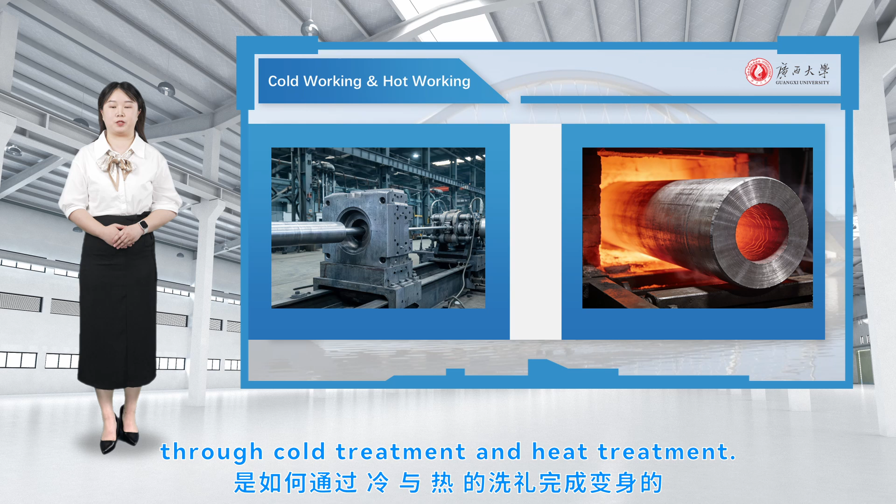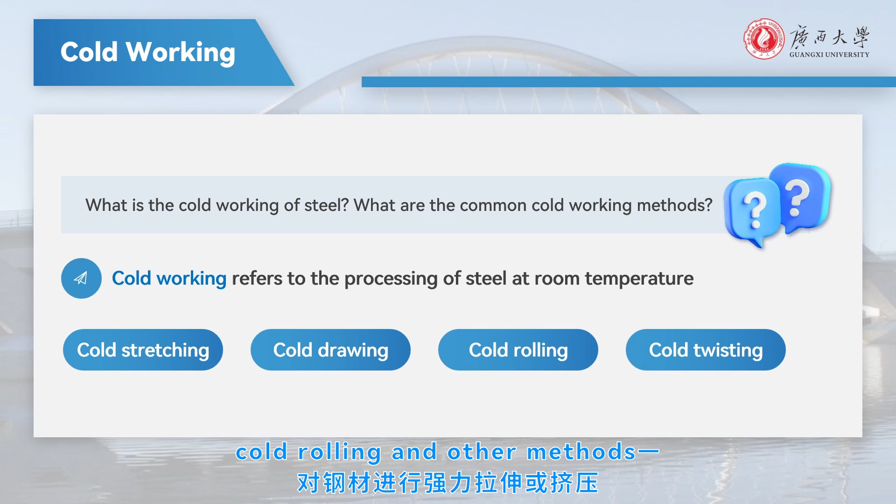First, let's talk about cold working. Here, cold means at room temperature. At room temperature, steel is stretched or compressed forcefully through cold drawing, cold rolling, and other methods. This is its transformation process.

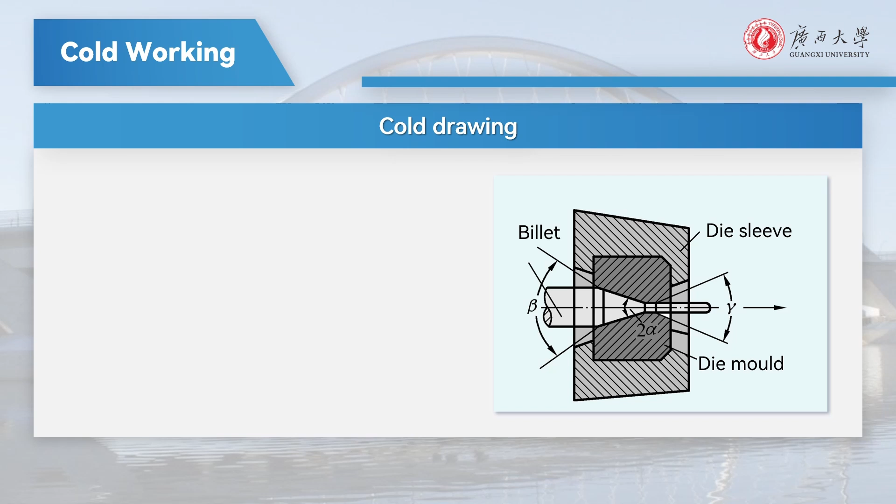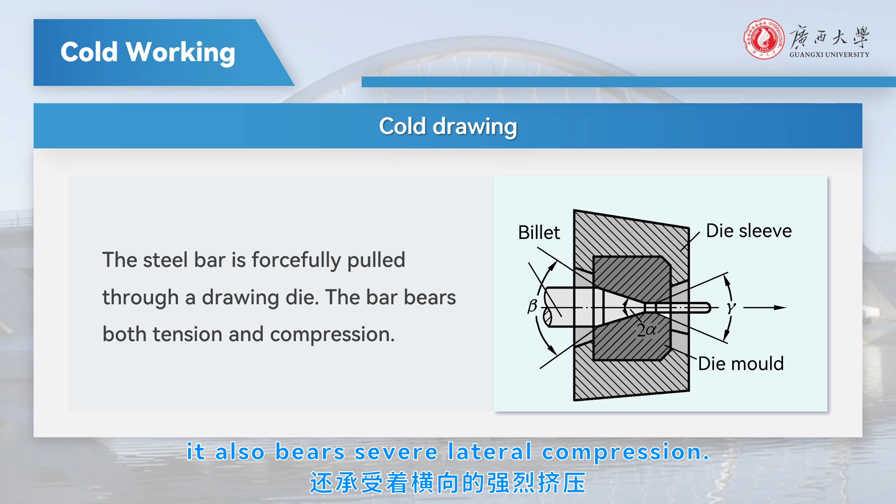Cold drawing pulls steel bars forcibly through a drawing die with a slightly smaller diameter. During this process, the stress state of the steel is very special. It is subjected to a strong tensile force in the longitudinal direction, and meanwhile, due to the restriction of the die hole diameter, it also bears severe lateral compression. This combination of tension and compression greatly improves the density and strength of steel.

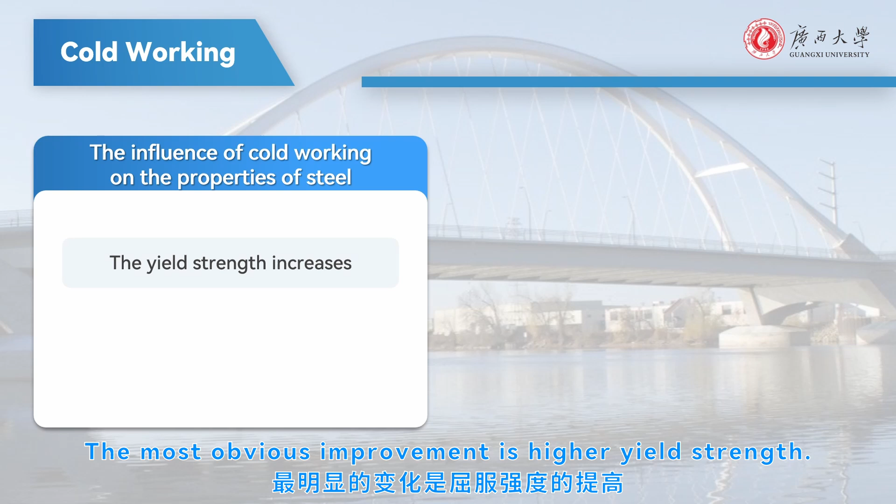Cold rolling turns round steel into deformed steel bars on rolling mills. What changes does cold working bring? The most obvious improvement is higher yield strength. To make it easy to understand, cold working is like physical training for steel.

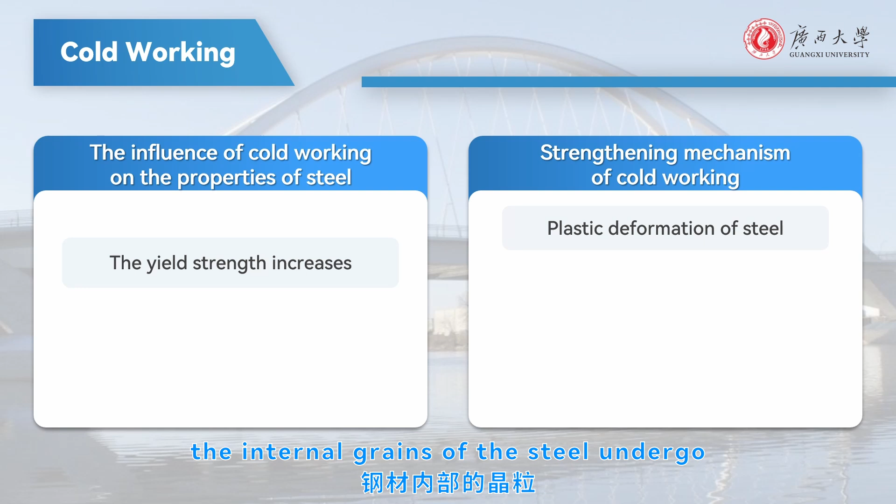Through force stretching, the internal grains of the steel undergo deformation and displacement, and the internal resistance increases significantly. Just as exercise builds muscle strength, cold working greatly improves load-bearing capacity.

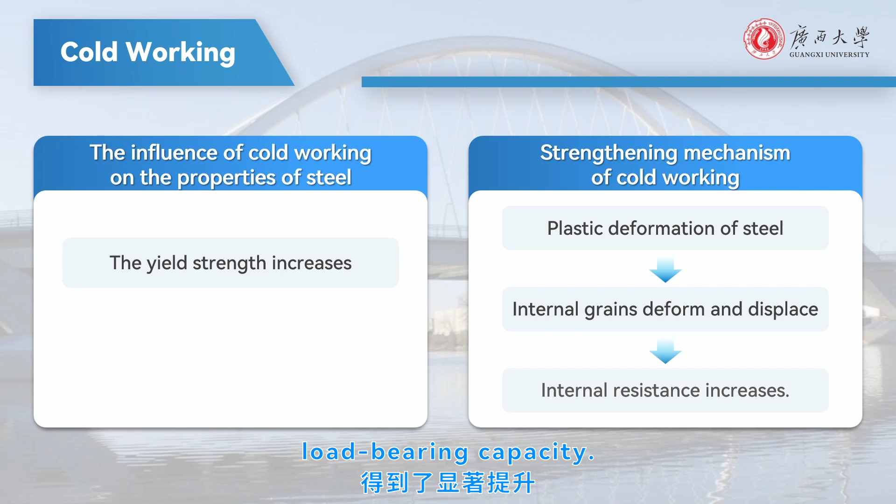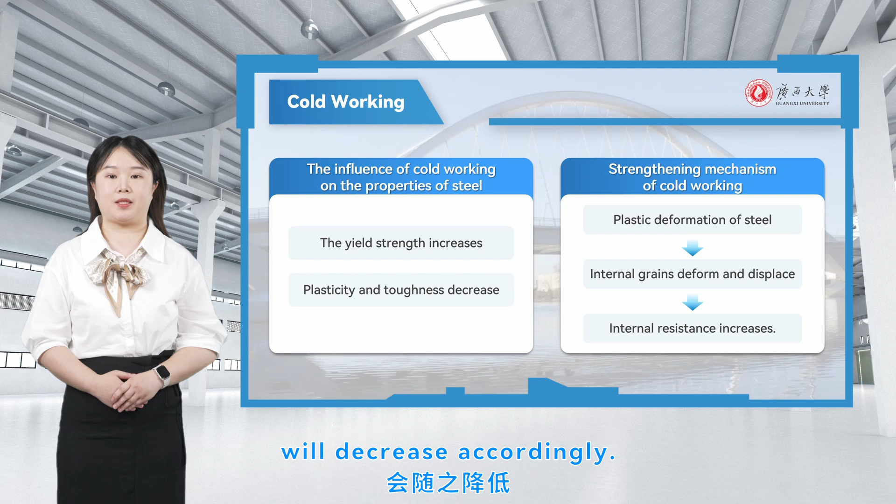However, moderation is essential. Cost of cold working is that the plasticity and toughness of steel will decrease accordingly. The steel becomes stronger, yet more brittle.

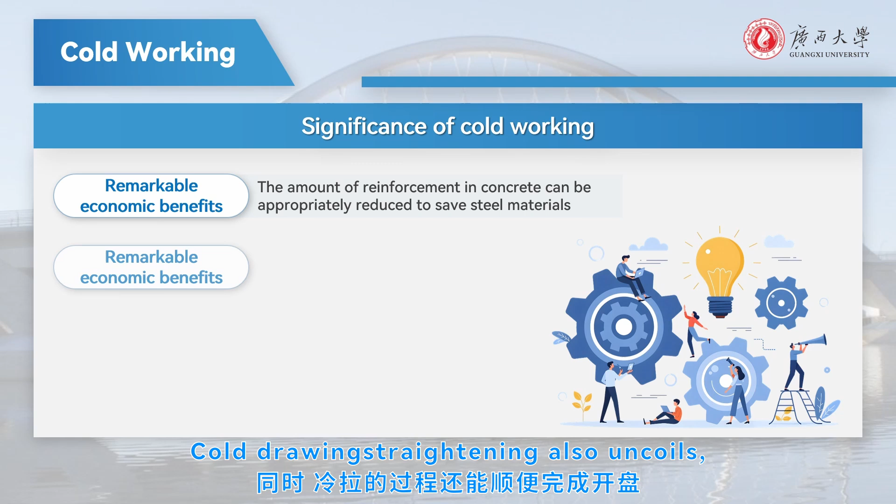On construction sites, cold working brings clear economic benefits. Higher strength allows fewer steel bars while meeting load requirements, saving materials. Cold drawing also uncoils, straightens, and even removes rust at the same time, simplifying construction steps.

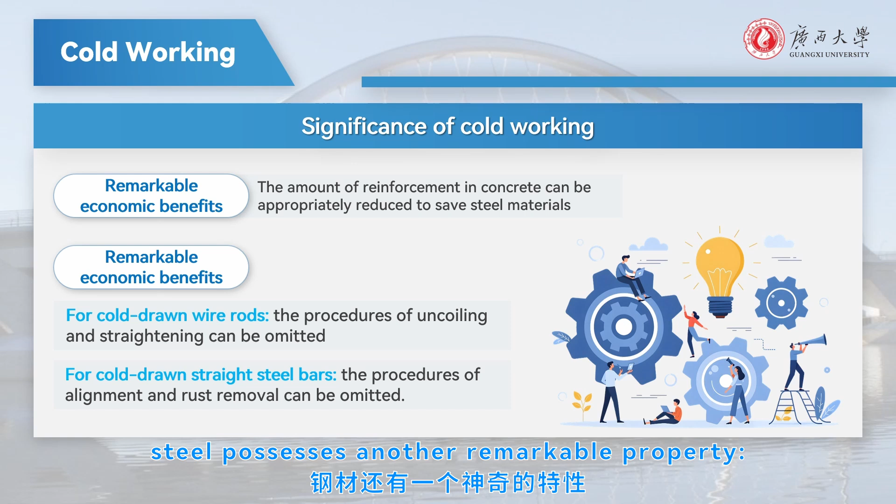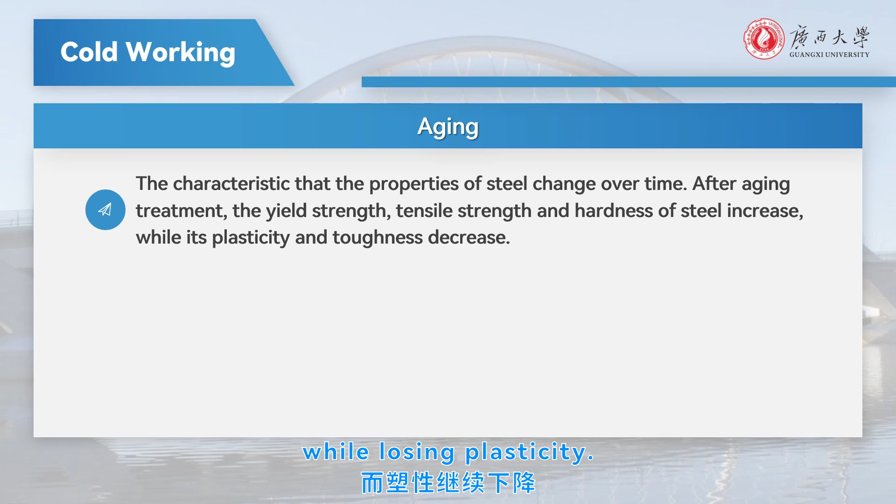After cold working, steel possesses another remarkable property: aging. Just as steamed buns turn hard after a long time, cold-worked steel gradually gains higher yield strength while losing plasticity. If you cannot wait for the half-month natural aging process, you can heat the steel to 100 to 200 degrees Celsius and keep it at that temperature for 2 hours.

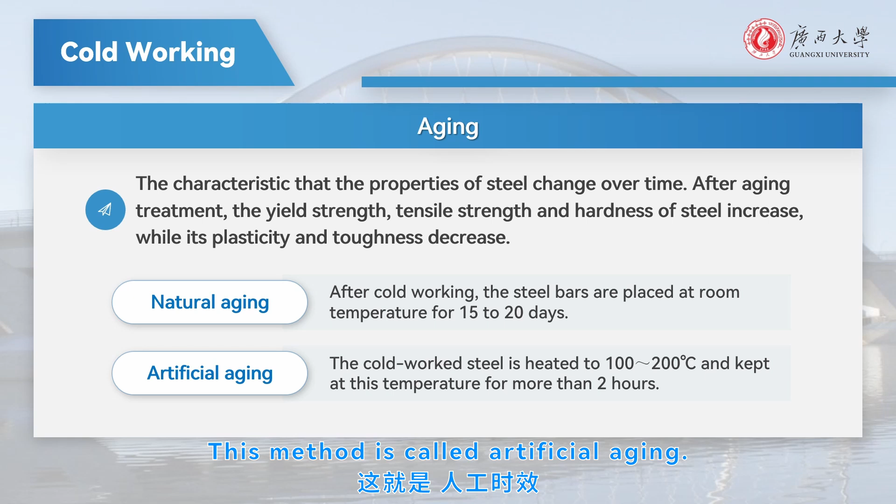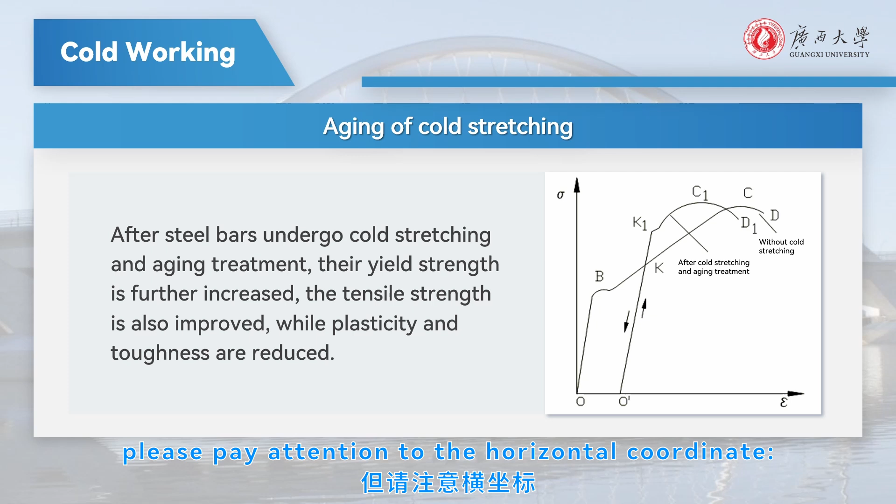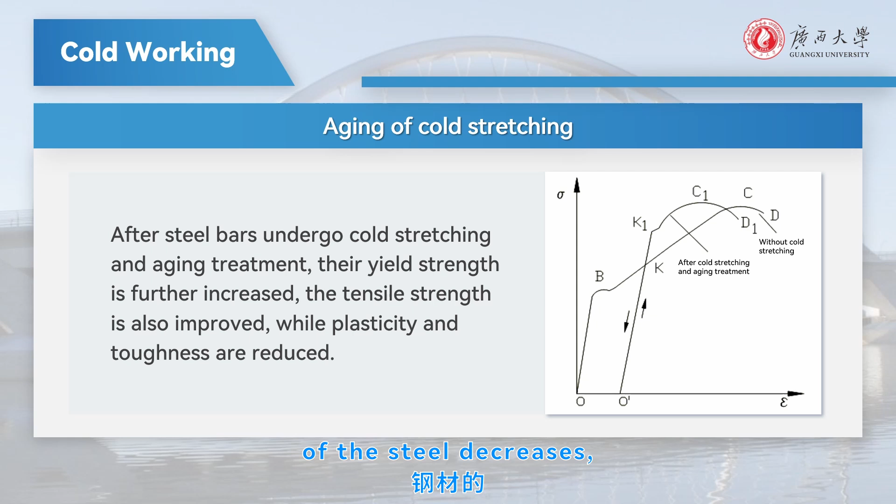This method is called artificial aging. Look at this stress-strain curve. Steel bars subjected to cold stretching and aging treatment, their yield point rises from point B to point K1. Although the strength becomes higher, please pay attention to the horizontal coordinate. The overall deformation range is significantly narrowed. This means the deformation buffer capacity of the steel decreases, and the material becomes harder, more rigid, and fragile.

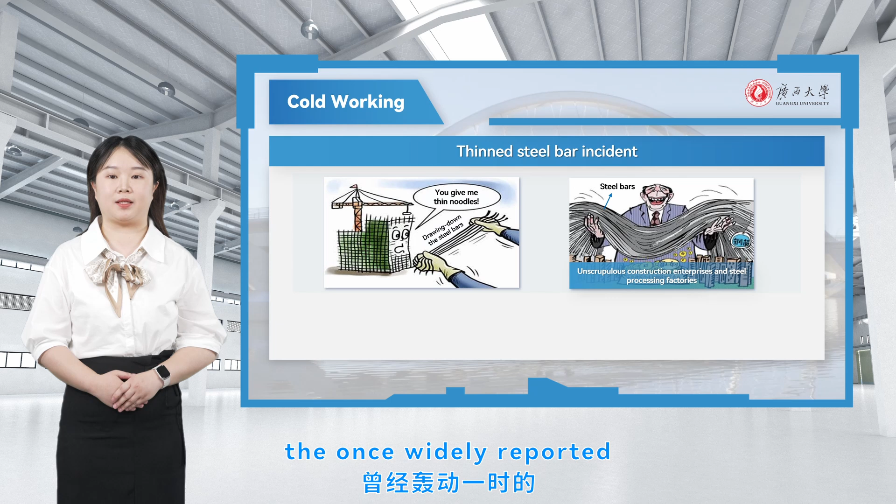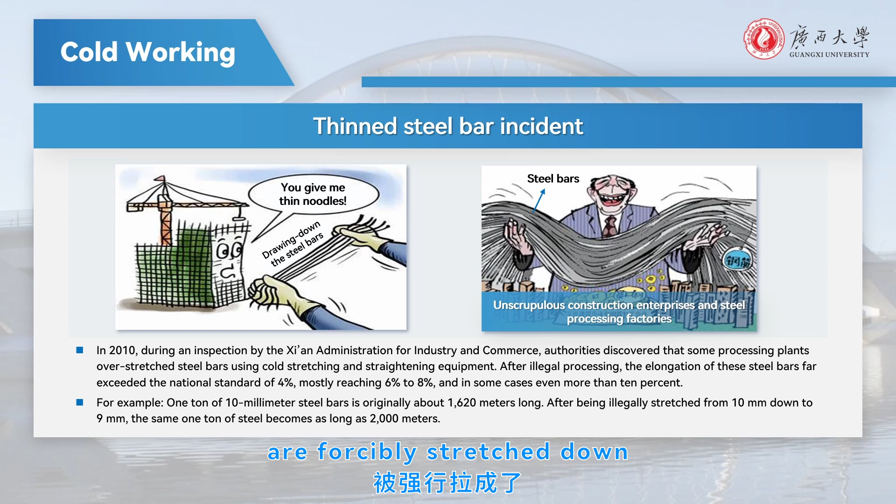When talking about cold stretching, we have to mention the once widely reported illegal thin steel bar incident. Some unscrupulous manufacturers overstretch steel bars for profit. A ton of original steel bars with a diameter of 10 millimeters are forcibly stretched down to 9 millimeters in diameter. Although the total length increases, the cross-sectional area shrinks. Most fatally, the steel becomes extremely brittle.

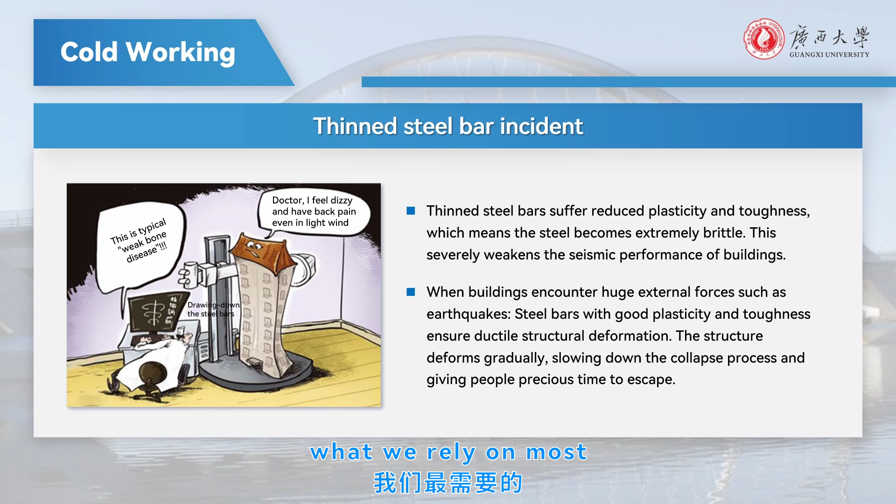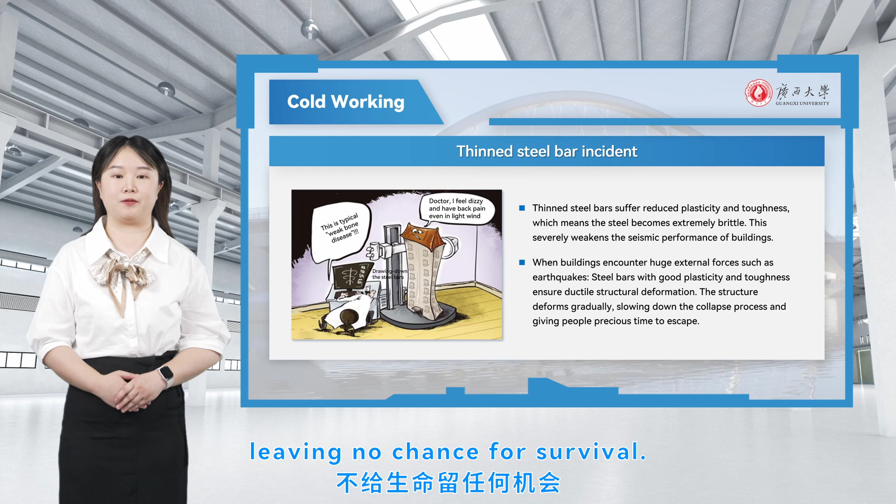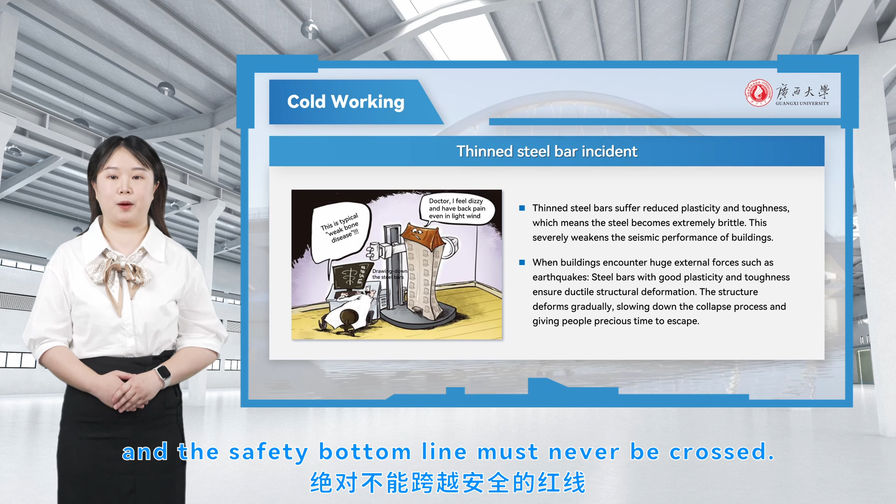During an earthquake, what we rely on most is the ductile failure of steel bars, which means the structure can deform gradually instead of collapsing instantly, providing precious time for people to escape. If such overstretched thin steel bars are used in construction, buildings may suffer sudden brittle collapse, leaving no chance for survival. Therefore, even though cold working can improve strength, all relevant construction specifications must be strictly followed, and the safety bottom line must never be crossed.

Having finished explaining cold working at room temperature, we will finally talk about the art of fire and water, heat treatment. Simply put, heat treatment is a process that heats steel to a specified temperature, maintains the temperature for a certain period, and then cools it down. It changes the internal microstructure of steel to obtain the required mechanical properties. As the name suggests, heat treatment definitely involves heating and temperature rising procedures.

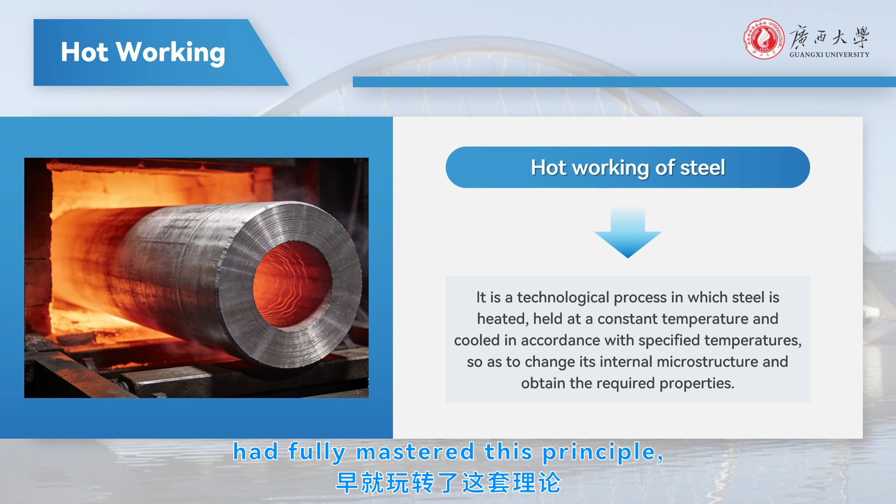In ancient times, people found that high-strength and high-hardness steel was extremely difficult to process manually. However, once heated, steel softens significantly and can be easily forged and shaped. Moreover, the cooling method after processing directly determines the quality and performance of a forged sword. Ancient Chinese master swordsmiths had fully mastered this principle, which includes 4 core processes.

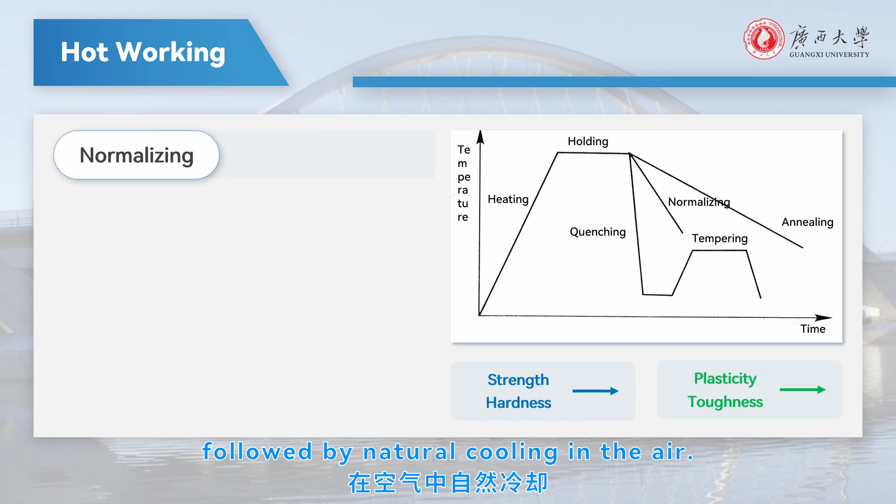First, normalizing: heating the steel followed by natural cooling in the air. This process increases hardness while slightly reducing plasticity.

Second, annealing: heating the steel and allowing it to cool slowly inside the furnace. This relieves the internal stress of the steel, improves its plasticity and toughness, yet reduces its strength.

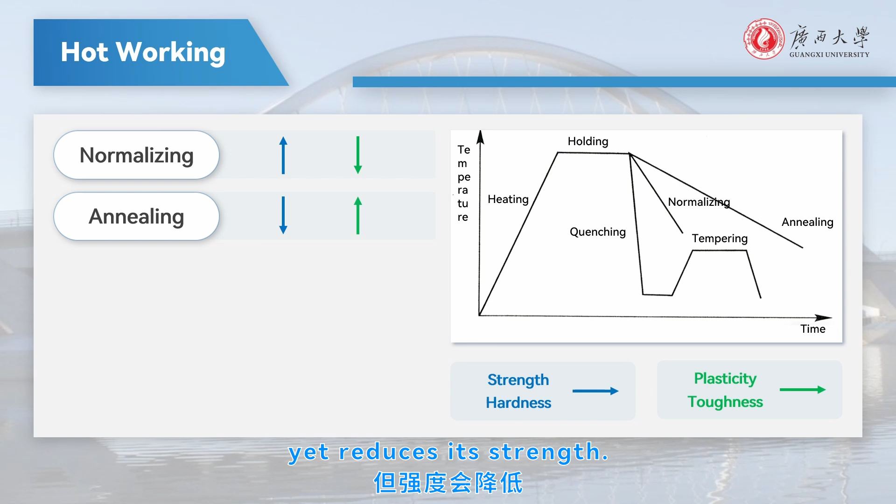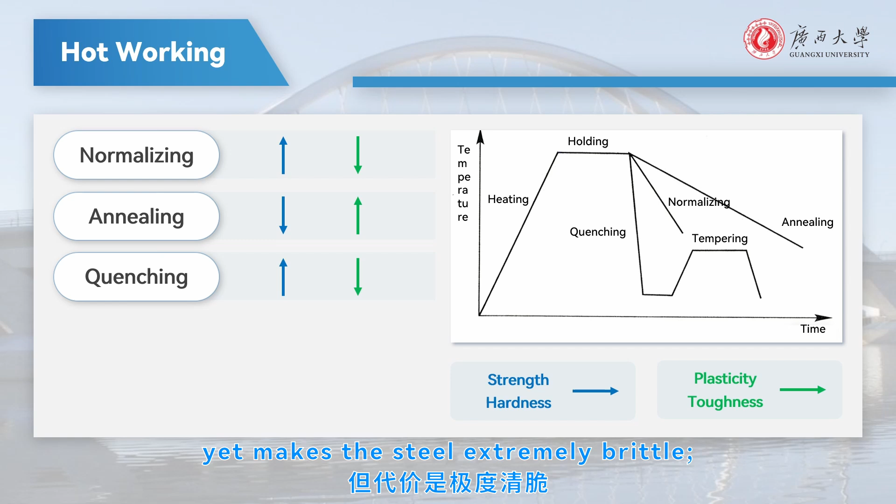Third, quenching. This is the classic sizzling scene often seen in movies and dramas, immersing red-hot steel into water rapidly. This boosts the strength to its peak instantly, yet makes the steel extremely brittle. It may break with a slight impact.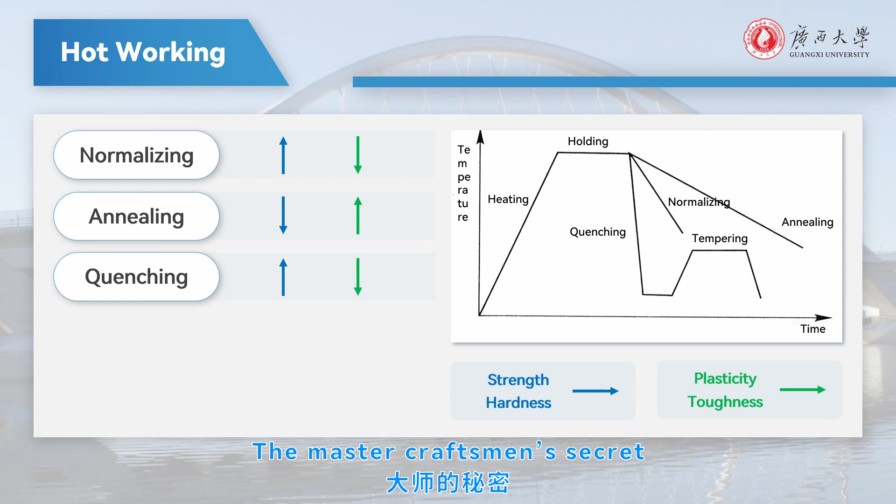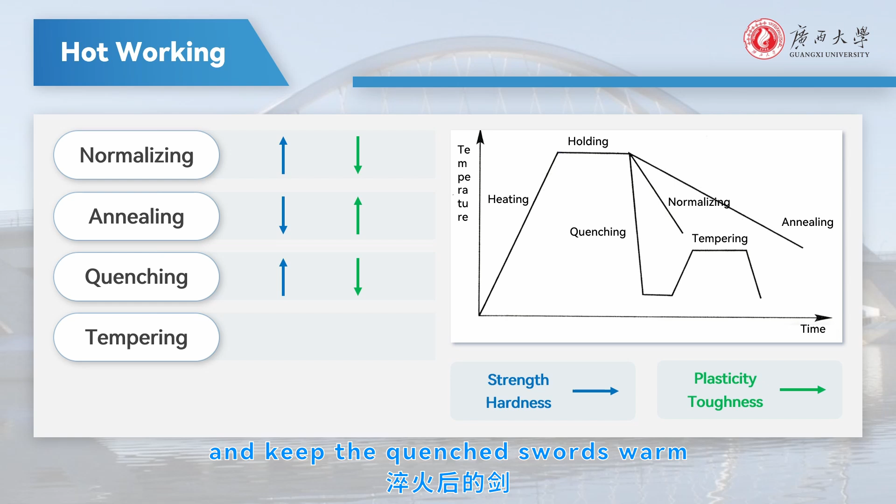Then, how to forge a peerless sharp sword that never breaks easily. The master craftsman's secret lies in the final step, tempering. After their apprentices finish work, the masters will secretly reheat and keep the quenched swords warm beside the furnace. This procedure enables the sword to retain high hardness while recovering the lost toughness.

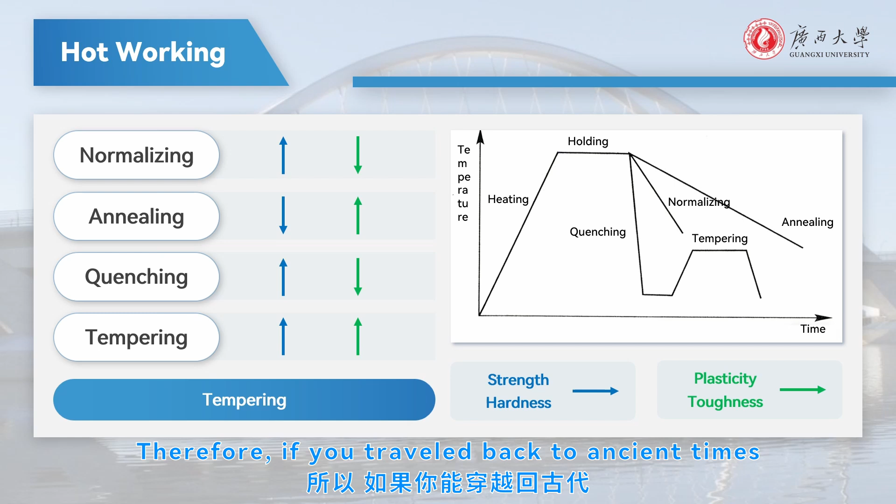Therefore, if you travel back to ancient times and mastered the secret combination of quenching and tempering, you could also become a famous master craftsman.

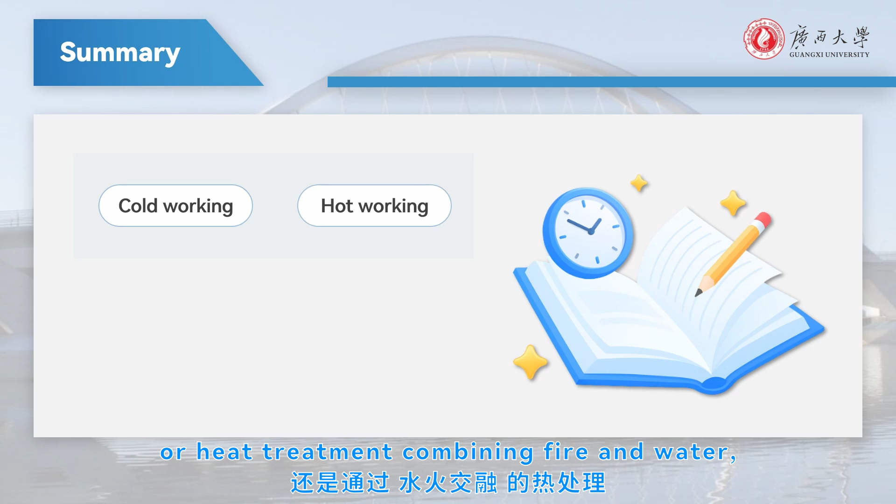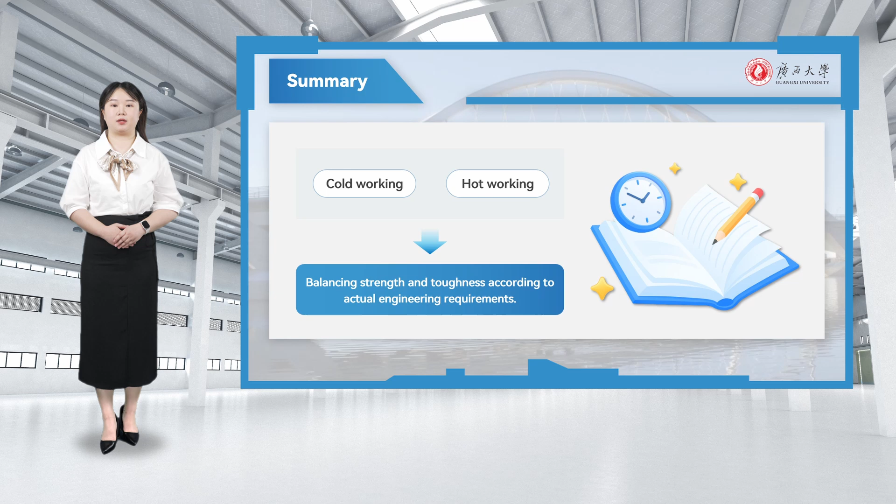Everyone, whether adopting cold working similar to physical muscle training or heat treatment combining fire and water, we always stick to one core goal: balancing strength and toughness according to actual engineering requirements. Please remember, technology can modify material properties, but as professional engineers, we must control such power with strict specifications and professional ethics.